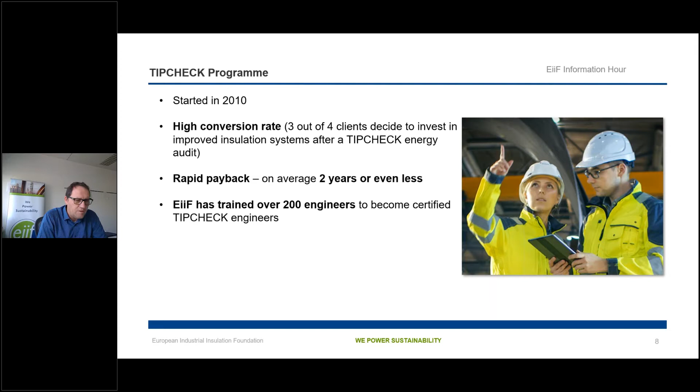We have trained more than 200 in the past years to become certified TIPCHECK engineers. And in total, 2,500 TipChecks have been carried out until today, more or less 500 in industry. So we talk about chemical plants, refineries, bigger breweries, food sector.

But also 2,000 have been carried out mainly by one very active company, which is specialized in flexible insulation mattresses to be put around valves, flanges, and this kind of stuff. And they focus very much on hospitals, airports, schools, so HVAC systems, which is very, very interesting also for the smaller insulation enterprises.

What we do from our side, Luis gives technical support. So if our TIPCHECK engineers have a problem, need some consultation, are not sure how to calculate maybe a special condition or situation, they can always address this to Luis, and Luis is supporting there.

We developed the TIPCHECK calculator, a dedicated and tailored software to compare systems and to identify the most economic insulation solution for the client. And now with the TBI app, we are also supporting with the TBI software, a professional tool, and we will give you more details during this information session today.

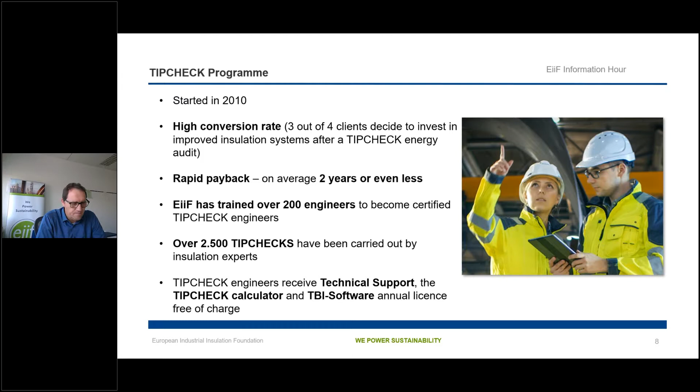Just very quickly, TIPCHECK engineer is limited to EiiF member companies only if you are an insulation expert, and this is for quality assurance. If you are an independent energy auditor, you can participate in the program without the need to become an EiiF member.

The reason for that is that we created this rule so that our companies can show their clients that the energy audit is really focused on energy auditing and not first of all on the wish of the offering insulation company to increase the insulation business.

And there's always an independent quality control possible if the client wants it, to check that we are really looking at energy issues and not at insulation business issues.

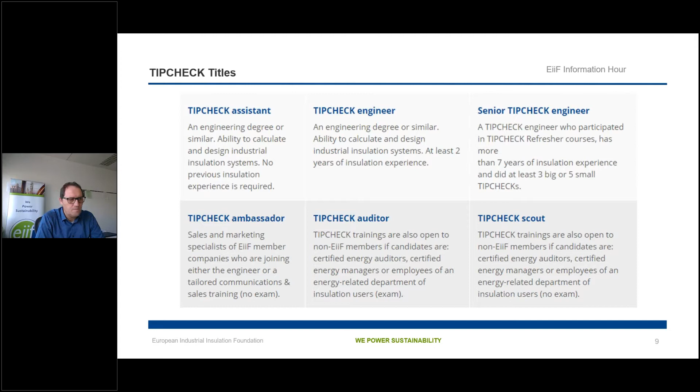Okay, looking at the TBI app, and there we get practical now. We are currently further improving it. Well, I don't want to say improve it because it's already mature, but with the expertise and the feedback from people more and more using it, we do see that here and there we could add another nice function to help it.

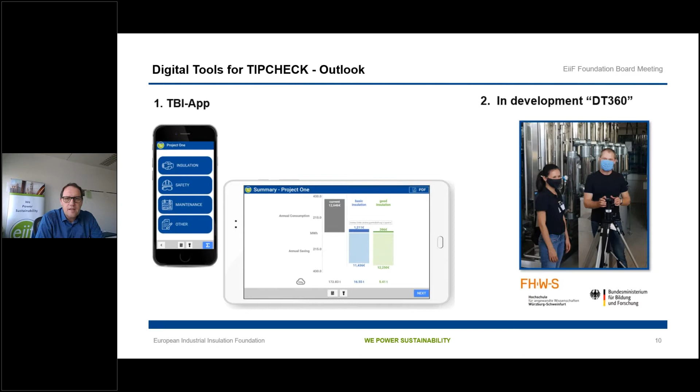And what you see in development, DT360 is something really, really interesting. We are developing it since 2016 in cooperation with a German university. It was funded by the German government, but we will go more into detail later on.

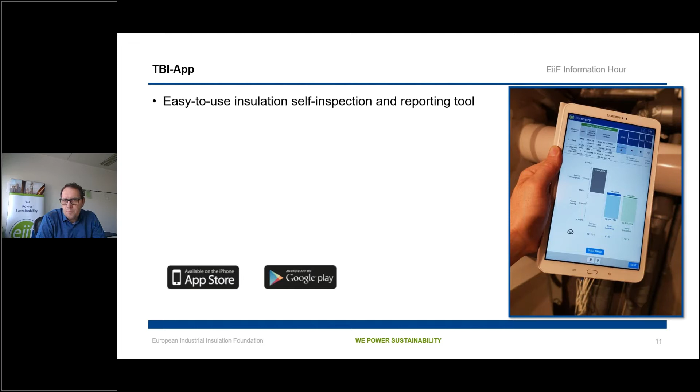What is the TBI app? For those of you who don't know it by now, it's for free. You can download it in the common app stores, and it has been developed as a very easy to use self-inspection tool. So anyone can use it.

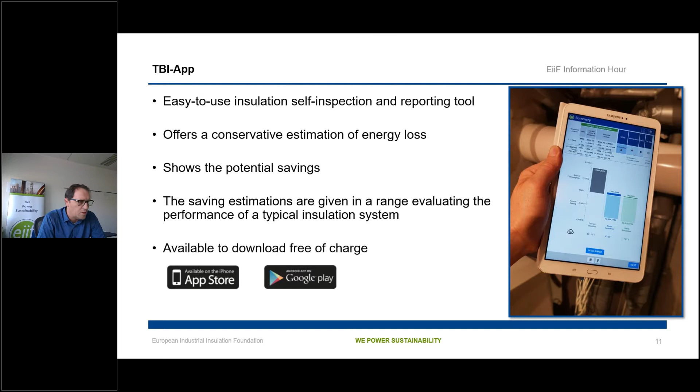It offers usually a very conservative estimation of energy losses, shows the potential saving in a nice and almost financial graph. And the saving estimations are given in a range so that you can say between good and basic insulation, you can save either 60 or 70 tons of CO2, depending on what you choose. And as I said before, it's available and you can download it for free.

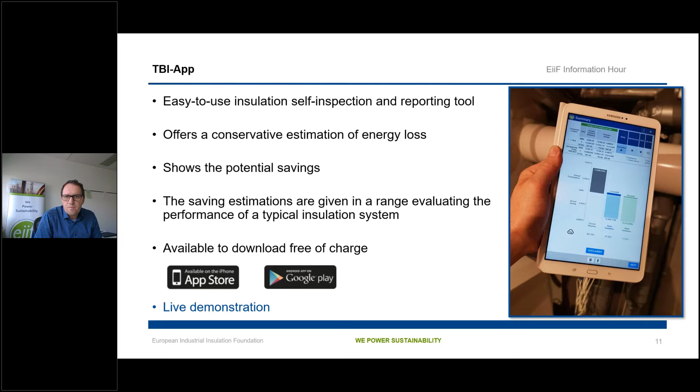And I will now switch to the tablet to show you the basic use of it. So let me just quickly do that. I have to find, and the tablets here, we have them, make presenter, okay.

Okay, perfect. So what you see on the mobile device, no matter if this is a phone or a tablet, it's available for iOS and for Android. You click on the TBI logo. Sorry, I will just quickly close that so that we really start from scratch.

Okay, you click on the TBI logo and you see the TBI is starting. First, you are asked to insert your name. I'll do this in a very short form. This is very important because different people can use the same TBI app on the same device.

This is interesting for companies. And you will always see who did the report, so that later on, when you look at the TBI report, you can check who did the inspection.

What you see here is we are on the project level, and you can see I'm using the GoToMeeting mouse. You can see that, for example, in the demo project, we did 10 insulation, 2 safety, 3 maintenance, and 2 other projects. But for today, we start with a completely new one. For this, I click on the plus.

And let's say, first of all, we take a picture. I use it, or I take it from the gallery to have something nice for this project. We give it a name. I call it Info Hour.

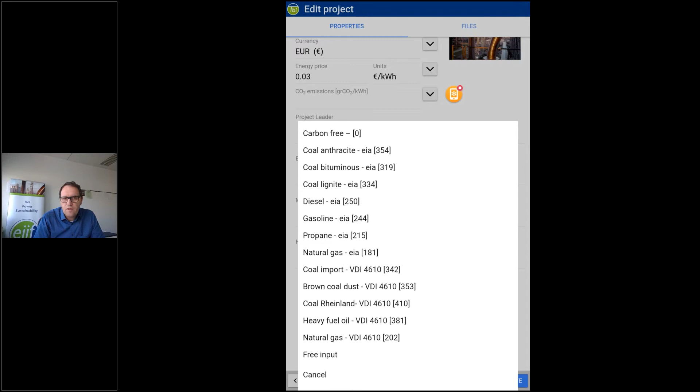You can define the currency. We stick at euros. You put the energy price, 0.03. CO2 emissions, by pushing this arrow, you get proposed a different kind of fuels, and related to that, the CO2. So we go here and we take 202. And then you can fill in the name of a project leader and so on and so forth.

But I guess we all know how that works, so I won't do that. And I save the project. Now, looking at the project level, we see the new project Info Hour. I click on it and I can start with my inspection.

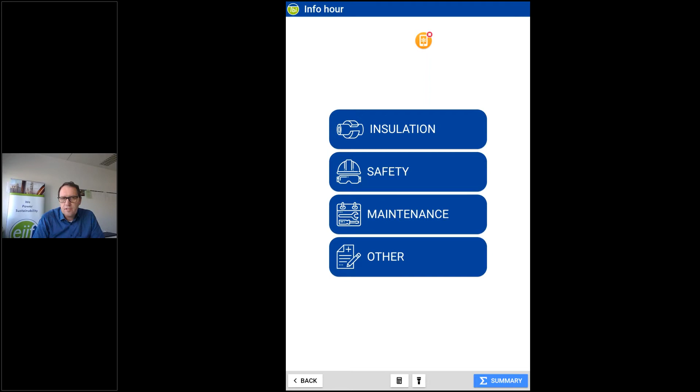What you see here is that you can choose to report either an insulation project, safety, maintenance, or anything else you would like to report. And of course, we go on insulation.

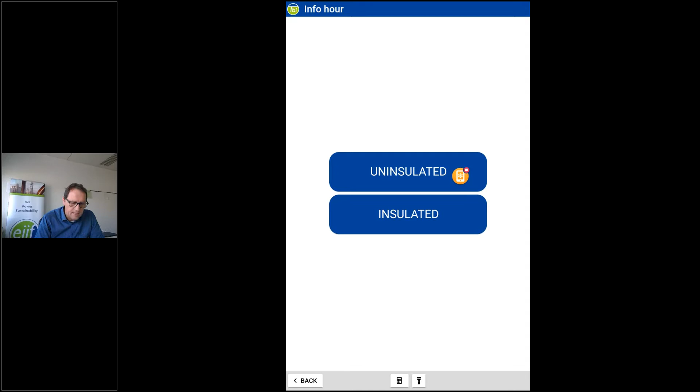Here you can choose between uninsulated or insulated. In our case, we take uninsulated. Then the tool asks you, are you looking at a pipe, a valve, a flange, or maybe a surface? In our case here, we take a pipe.

To make it easy for you to understand what the pipe is, we first take the picture. By clicking on this icon, we can take a picture. I could take a picture just now from my plant, but that doesn't really help us. So I still say, okay.

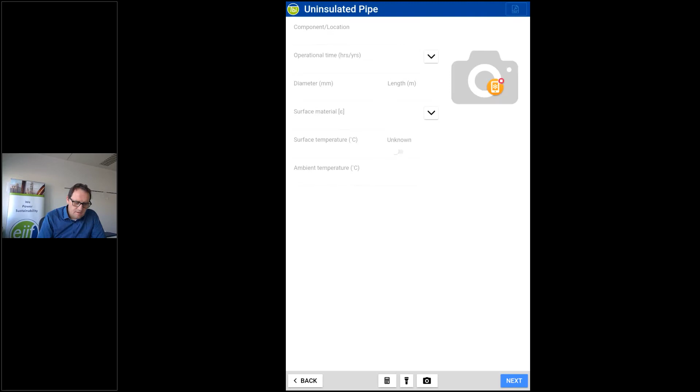And I click once more on it. I take it out and I take a picture from the gallery, which is a little bit more industrial. So choosing from my gallery, I take this one. Let me know if I'm too fast.

I'll make it big. So what you can see here is a typical TIPCHECK situation. There is a pipe. Some parts are insulated outside, pretty wet, the insulation material, but at some part there is not even insulation left anymore. And this is the situation we are looking at.

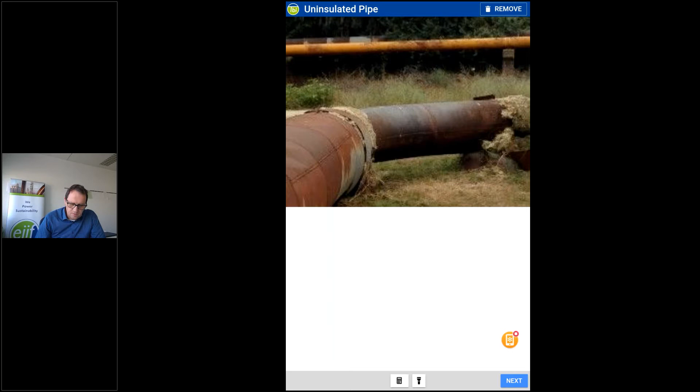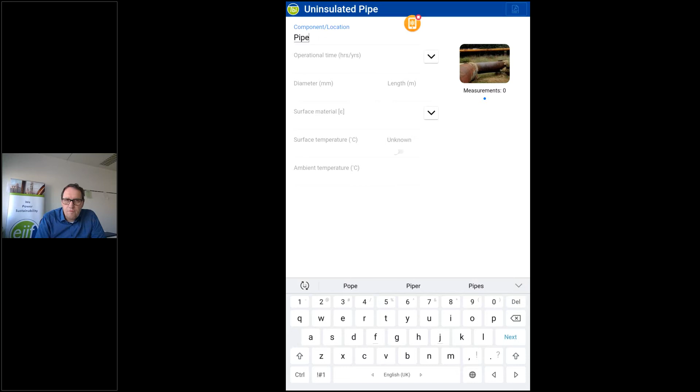All I need to do now in the TBI app is to give this a name. I call it pipe. For now, this is good enough. We need to know from the asset owner, our client, is this system operating for how long during the year? 1,000 hours or maybe full year.

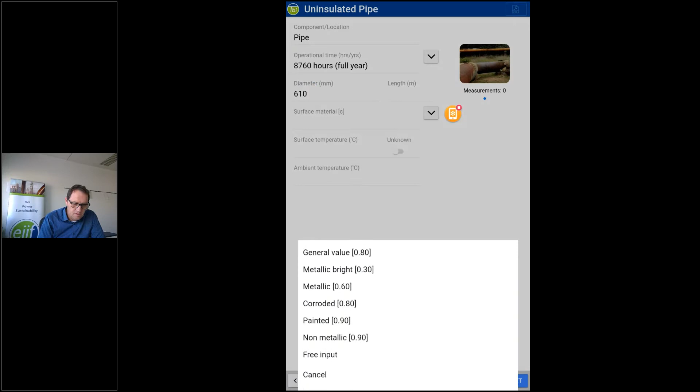I'm choosing the full year. The diameter is DN600. So in millimeters, we need to insert 610. The surface material we see is corroded, so I can choose the corroded value for the emissivity.

The surface temperature we measured 250 degrees, and the ambient temperature is 10. Okay. After doing all this, we click on next.

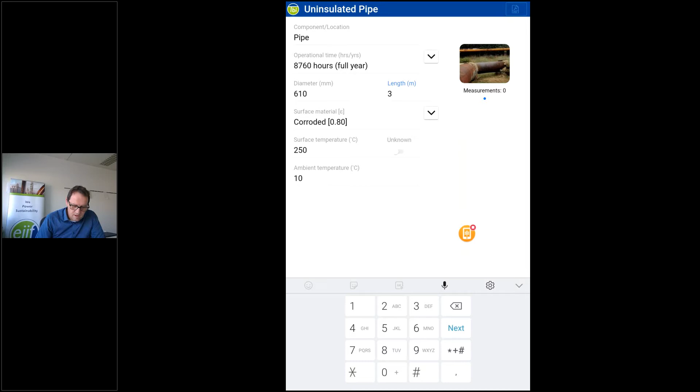Sorry, I forgot the length. That's nice. The tool is so smart that if you make a mistake, it tells you. So we assume, or we estimate this is 3 meters length. And then we click on next.

And what you see here now is you get a complete result. The current situation, we are losing 7,400 more or less euros. And we can reduce these losses with a good insulation in place down to 158 euros only, meaning we save between 6,700 and 7,200 euros.

But even more important, we can reduce from 50 tons to 1 ton only. And it also shows from an economic aspect how useful this activity or this measure is for the installation client. And that also explains why usually at a TIPCHECK, the conversion rate is 75%.

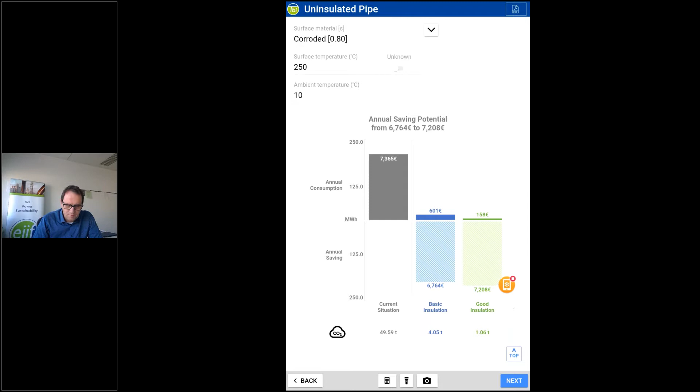We then click to the summary, and in the summary, we will get all the results. As we don't have enough time, I will just quickly show you the summary of the demo project, which we did before. And here you see, turning my tablet,

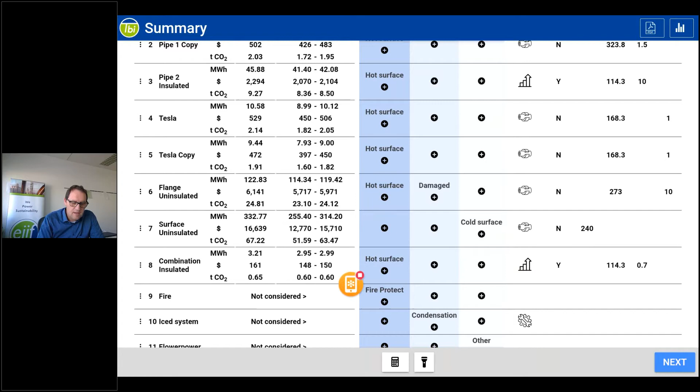that we have created a lot of projects with a lot of information and different reports on safety, maintenance, but also energy efficiency. And in the end, we get the total result of the project with all components calculated together to one.

By clicking on the PDF, we get a full TBI report. And I won't do this now, but I want to ask you, if you're interested, please go to the website. It's eiif.org/TBI. You find an example for the TBI report, and you find all the information needed.

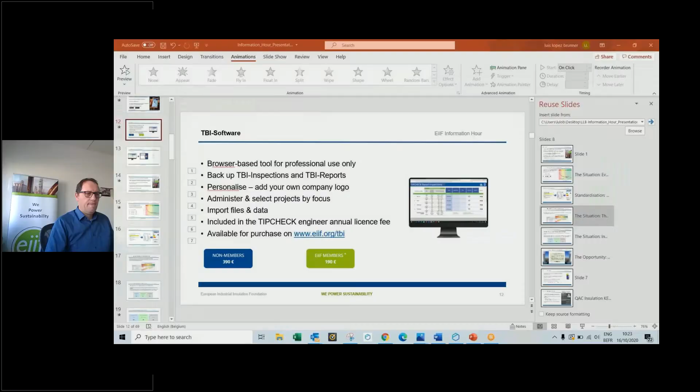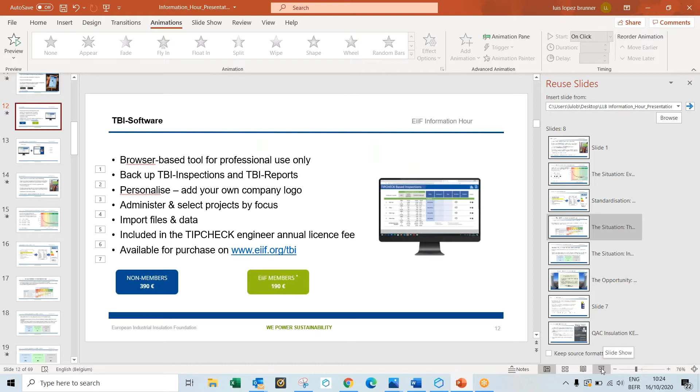In parallel to what Andreas just presented with the TBI app, we have also developed what is called the TBI software, a browser-based tool for professional use. It's basically a tool to allow us to administer and back up our projects.

You will be able to add more information about your client, and add extra pictures that you can take with your infrared camera. It's a tool that will allow you to organize and structure your work, but also to upgrade the report that you will offer to your customer.

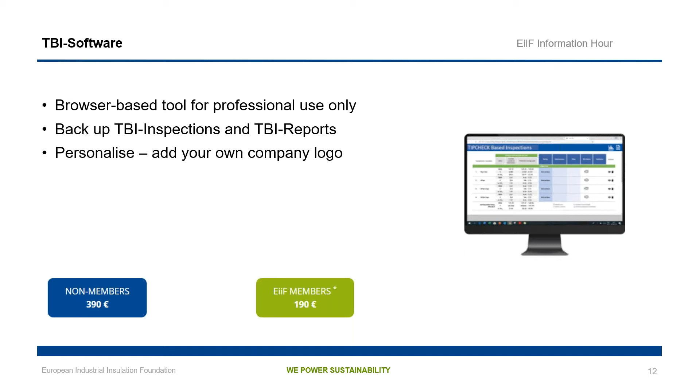What we start to see now with some TIPCHECK engineers is that they are getting organized in their organizations. The people on the field make the report, then send it to the central department. In this central department, a group reworks this report, and they maybe add an economical offer to finally present it to the final customer.

You can find all this information on our website, including the prices for non-members and members. What I can tell you is that this is something new.

We keep developing these two tools in order to reflect the needs from the market, and we have the best information providers, the TIPCHECK engineers. Based on that, we are developing new features for the tools.

For example, now we are working on a multilingual report, because we think the final communication with the customer is better in the local language.

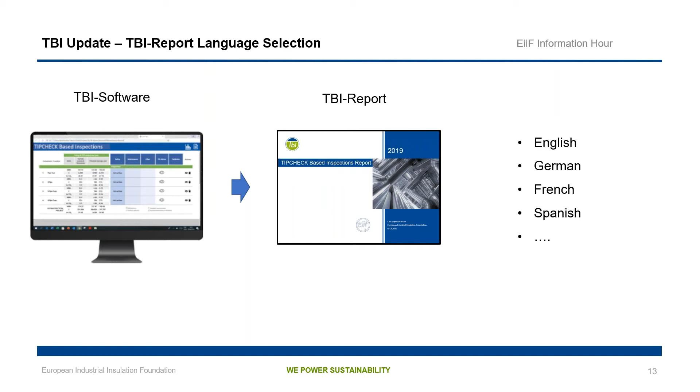Okay, now moving to the next point of the agenda.

Andreas just presented that we are working on a new study about the potential of insulation in industry. You probably already read the previous report, which was the starting point of our foundation, called the ECOFYS study. But we felt that with the new wave of the Green Deal, we had to have updated figures about the potential of our technology.

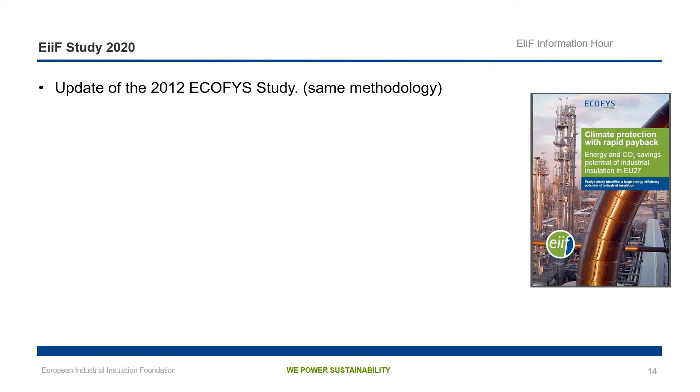So we decided to use the same methodology as the ECOFYS report, because that report managed to gather all the knowledge and experience until 2012. We used the same methodology, but updated figures for the energy consumption used in different industries and by country.

To do that, we bought a database from Enerdata, a consultancy company that works with European projects, in order to speak the same language as the people in the European Commission.

We have taken into account some new assumptions, because during the last 10 years we have also gathered good experience from energy audits. We included these new assumptions in the study, and finally we will provide the potential savings in energy and also CO2 emission mitigation.

This is based on energy classes defined by the VDI 4610, a guideline document available in Germany. We decided to use this methodology because we think it's the best way to communicate with the authorities and the best way to present the performance of our technology.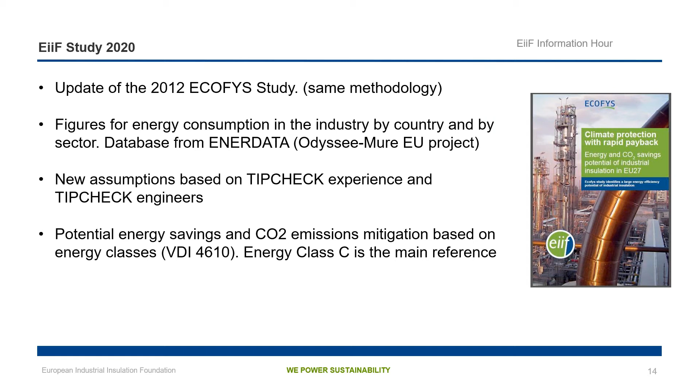We will go a little bit later into the next slide to present what is the meaning of these energy classes.

Finally, apart from the general study, we are going to provide fact sheets by sector and also by country. For our members, that will be very useful to work locally in order to increase awareness of the potential of industrial insulation.

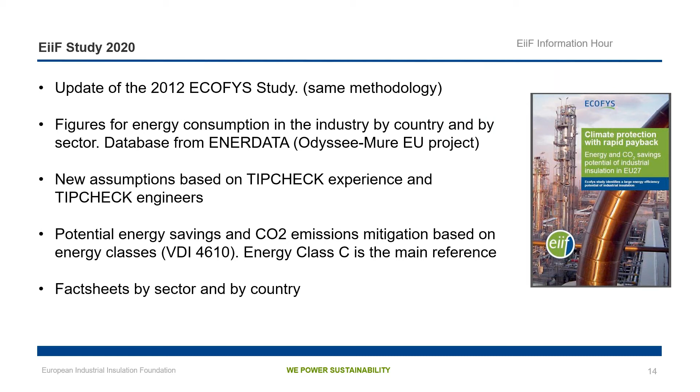As I said, we have chosen the energy classes as a reference, more specifically energy class C for our analysis, because we believe it is the easiest way to communicate about performance.

So the only document which is available regarding energy classes is the guideline from Germany, the VDI 4610, where basically they define or calculate heat losses in relation with the ecological optimum. So the standard, we don't have time to go through that in detail. We have spent quite a lot of time with our TipCheck engineers to explain how it works, and we are more than open to go through that with you too, if necessary.

So the standard defines what is called the ecological optimum, which is actually the lowest emissions in the life cycle assessment of the solution, not of the product, but of the insulation solution. So you consider the emissions from the manufacture, you consider also the emissions from the operation, and then you define what is the minimum of the life cycle assessment. And then based on this minimum, the standard defines the different energy classes.

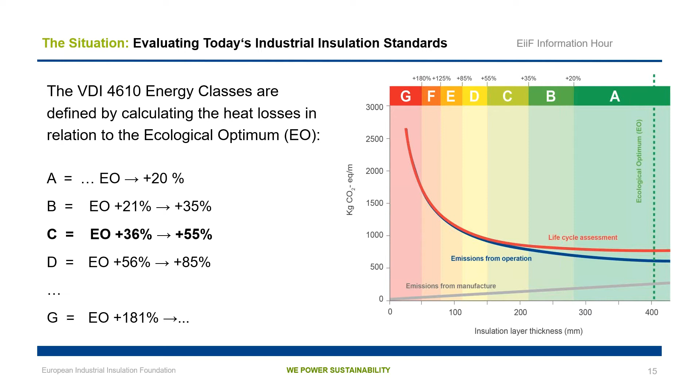So for these energy classes, there are some heat losses which are associated to this level of performance. And because we believe that this is the best way to communicate and to push the industry to increase their efficiency, we are also working on trying to upgrade this VDI 4610 part 1 guideline in Germany, to upgrade it to a European standard, maybe later also an international standard. We have already started some contacts with different standardization bodies, and we hope that in the coming months we are going to have a better picture about this project. That won't be for tomorrow, but maybe in a year or two it could become a European standard.

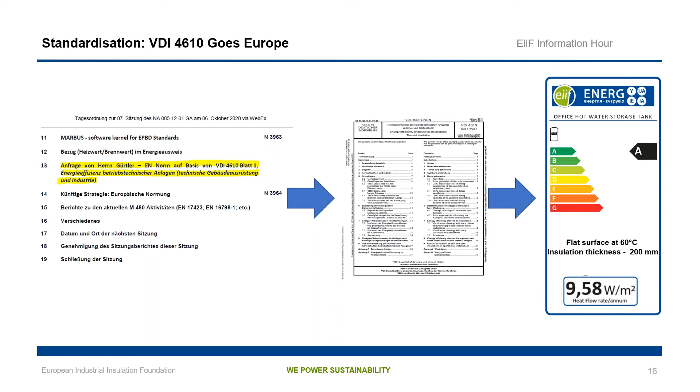So what is the situation? This is something that is explained in much more detail in our study, but just as a summary, we have identified that the good practice in the different countries in Europe is not sufficient to reach the ambitious target of the European Union.

Moreover, there are a lot of technical specifications which are not defined on energy efficiency, but just defined on safety, for personal protection. So they define a surface temperature in order to avoid that a worker gets burned. This makes the losses that we are having today, as specified in the technical specification, quite high, leading to high levels of CO2 emissions and high levels of energy consumption.

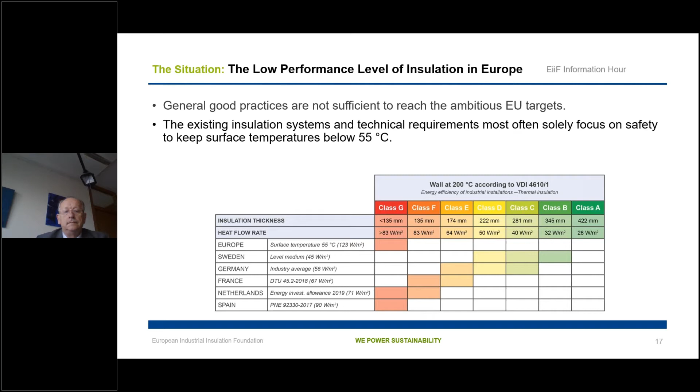So as you can see in this summary table, this is just an example for a wall at 200 degrees. We see that if we take into consideration this guideline, the energy classes, even the best in class, which is Sweden, only reach in the best case scenario an energy class C or B. Then we go to countries like Germany, France, Netherlands, Spain, and we see that the levels are, in general, on average, something like class F, class E.

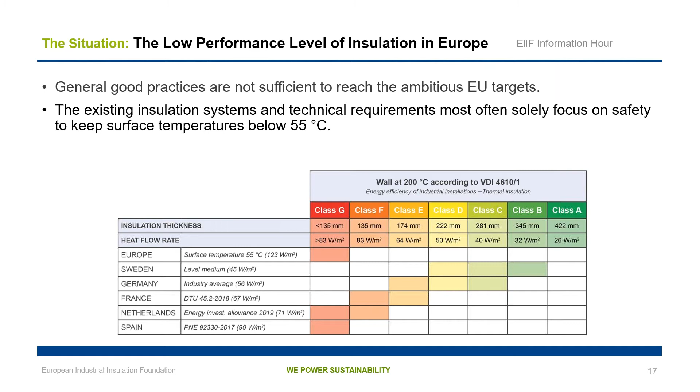So it gives us a lot of room to improve, and this is where we are going to work in the future, to try to convince the different administrations to show that there is this potential. But apart from that, and this is the most important point, many plants in Europe are quite old.

So we see that there is an important need of maintenance, of repairing insulation. It means that even though the technical specifications are not very performant, in reality the real performance is much worse, because it's not properly maintained, because some components have fallen apart and nobody has replaced them. So what we see is that in reality, the real losses are much higher than the losses you could calculate with the technical specifications, which are not very good already, as we have seen in the previous chart.

So this is actually our starting point for our study: we know the technical specifications, how they are. We know that it's not properly maintained, so the losses are higher than what they have in their specifications. We have taken these values from our experience in the industrial insulation branch, which says that, for example, at middle temperature, there is 6% of the surfaces which has a system that is damaged or where the insulation is not existent.

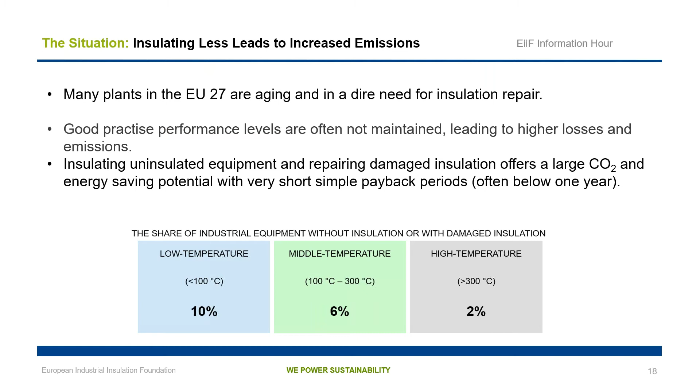Okay, so the study, the figures have already been processed, so we know what will be the output of this study. We are just working on the document to add all the graphical parts and working on all these fact sheets for countries and for sector.

And what we have identified, just regarding emissions, is that we could avoid up to 40 million tons of CO2, which is a very important figure, and which resounds a lot when we talk with people from the European Commission.

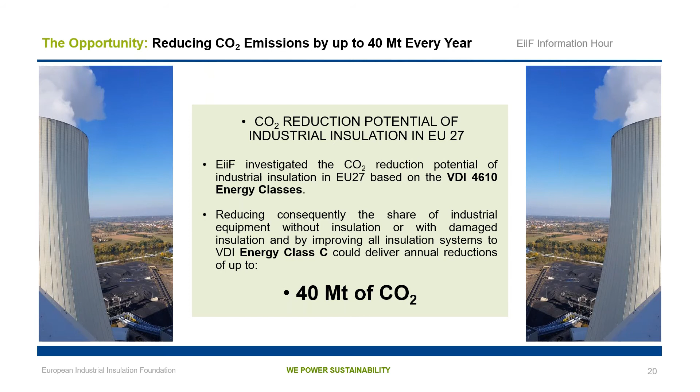And apart from this 40 million tons of CO2 emissions, they come from, as explained before in the study, a reduction in energy consumption. So what we calculated in the study is what we can save if we upgrade our insulation systems. Doing all this calculation, we found that we could save for the industry in Europe up to 14 million tons of equivalent oil, which is very, very impressive.

We were all amazed and surprised about this potential, because it represents 10% of the gap that we need to close to reach the 2030 target.

So if you look at the chart, today what we are consuming in Europe is 989 million tons of equivalent oil. We know the target in 2030 is 846 million tons of equivalent oil, and we can provide savings of 14 million tons of equivalent oil. So it represents 10% of the way to reach the final target set by the European Commission.

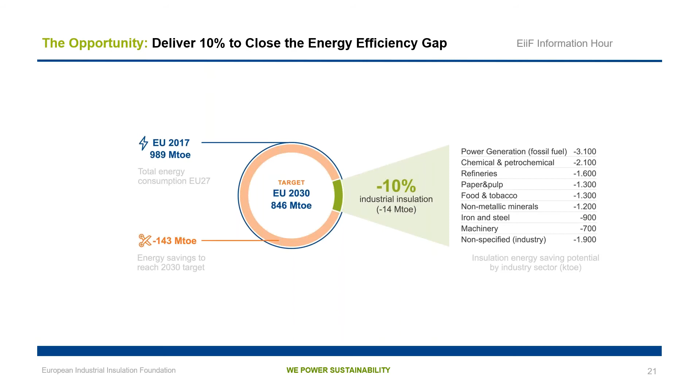And as I said, we have all these figures split by sector and by country. So we can even approach some European associations, for example for steel manufacturing, and try to convince them, to convince their members, to at least look at the technical specifications they are using today in the industry.

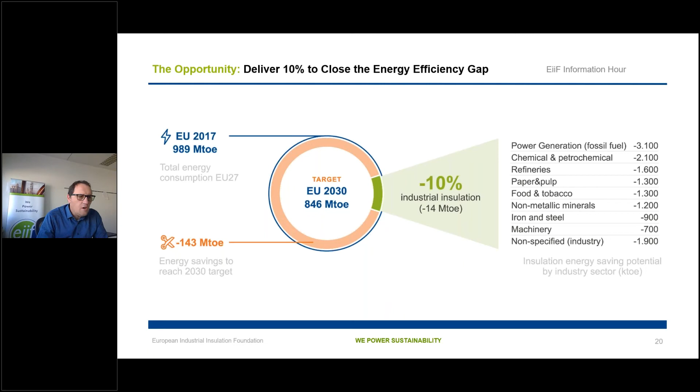So let's go into practice and take one of the examples, another TipCheck engineer, Patrick Dallens from Bilfinger here in Switzerland. He went into a plant in Switzerland and identified a typical situation.

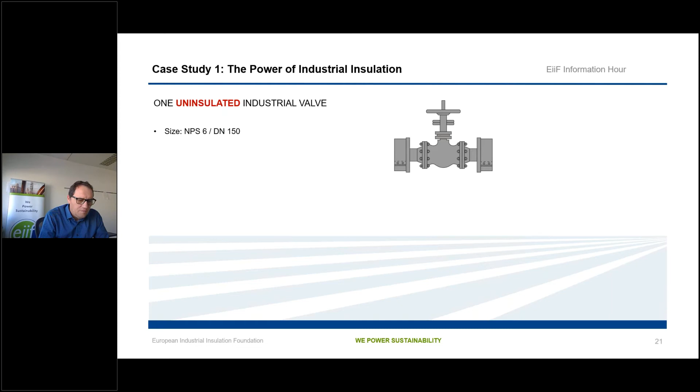Looking at the DN150 uninsulated valve, the temperature and energy input here to keep it at 150 degrees Celsius is about 10,600 kilowatt hours, as the system is operating and running all year. So you can imagine if you don't put insulation around this valve, these 10,600 kilowatt hours just fly away, which is what we try to illustrate in this graphic.

What Patrick then said was, let's put a box around it. And this was the thermographic image of his inspection. He said, if I put a box around it, and this is an energy class G box even, so a very standard solution, we can reduce the energy loss from 10,600 down to 600 kilowatt hours only.

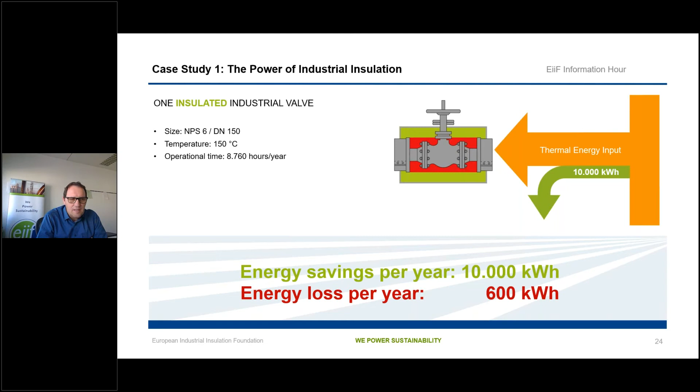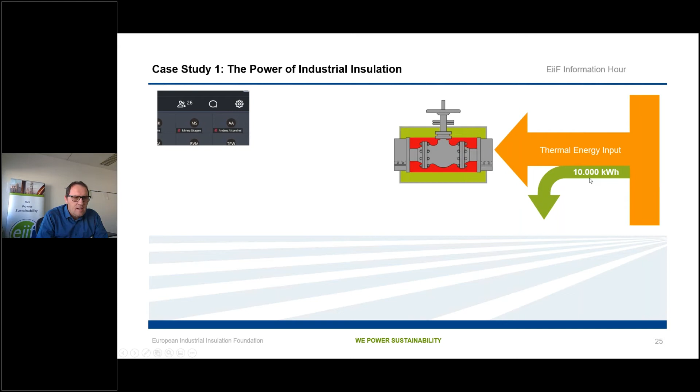His idea was, what can I do with this thermal heat which I'm saving, the 10,000 kilowatt hours? What Patrick said was, okay, I transfer the 10,000 kilowatt hours of thermal heat with 40% thermodynamic efficiency into electricity, and I use it to charge the battery of an electric car. Those of you who fancy cars may know which kind of car this is.

And what we would like to ask you now, please fill it in the chat function, we'll give you a minute for that. How far do you think you can drive by just insulating one valve with a standard box? Do you get 5,000 kilometers, 10,000 kilometers, or let's say a free ride ticket for the entire year because it will drive you 20,000 kilometers? Okay, please use the chat function, I'll give you a little bit of time. I see the first ones flying in, 2, 3, 4, perfect. More, please.

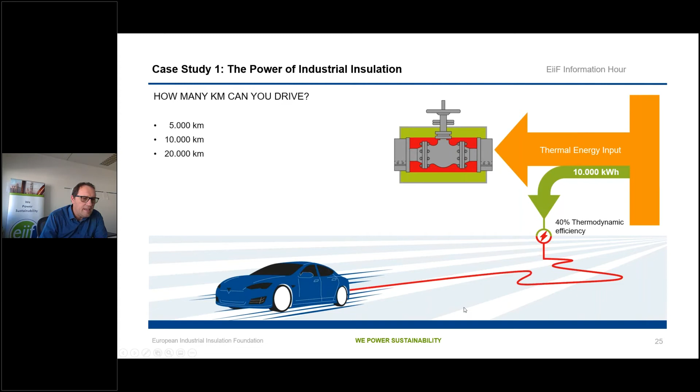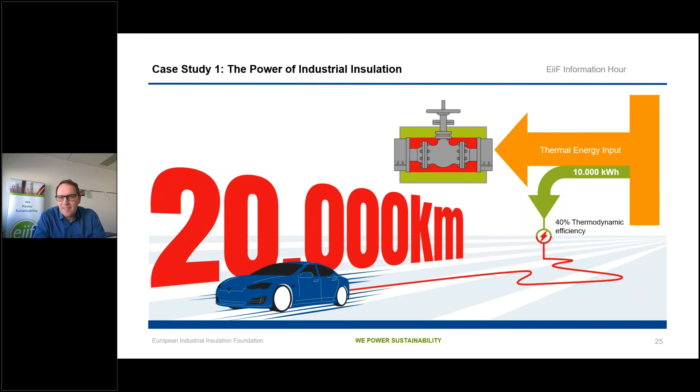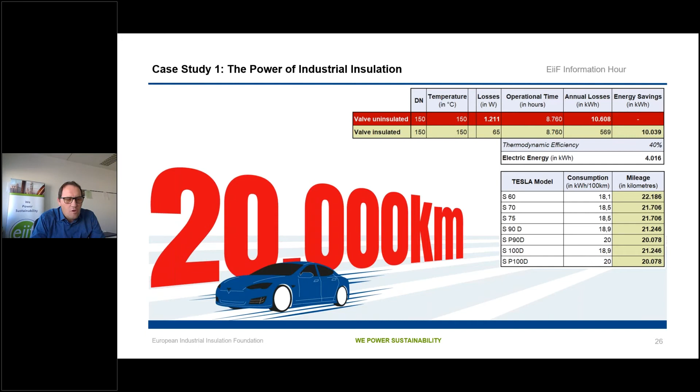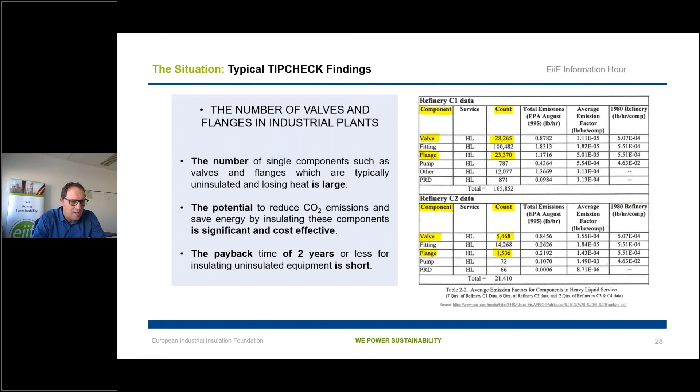Another example from our TipCheck engineer and Vice President Michele Manucci was that he received the job to remove the corroded roof of a storage tank, which after years with no maintenance had big corrosion problems, and there was the danger that the roof would fall inside the tank. He was asking the client, but who's putting the new roof? Who will apply the insulation? And the client told him, I don't put insulation anymore - it's just a 60 degrees Celsius tank, and I want to avoid any corrosion issues in the future. Being a very good senior TipCheck engineer, Michele explained to him the consequences and convinced him to do something.

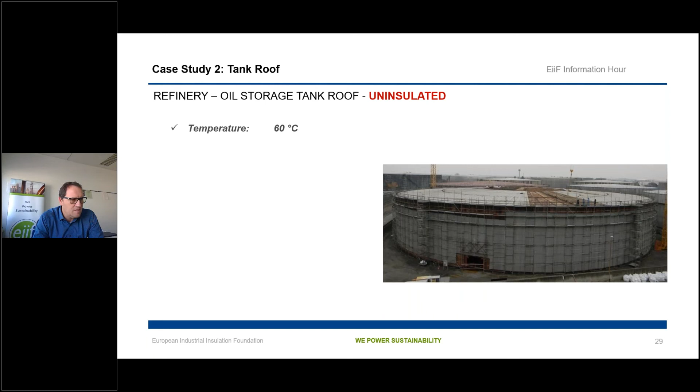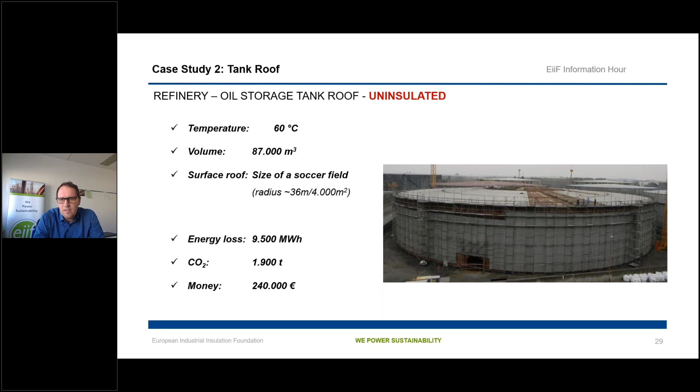So again, the temperature was 60 degrees. The volume of the tank is 87,000 cubic meters. The surface of the roof has the size of a soccer field, and the energy loss without insulation would have been 9,500 megawatt hours, emitting almost 2,000 tons of CO2 and a money loss in his financial budget of 240,000 euros he would have had to pay additionally as energy cost. Insulated with 30 millimeters, which is equivalent to the energy class G system, Michele convinced him that he could apply a system which has very high corrosion protection, but will also save him annually about 185,000 euros, energy-wise 7,500 megawatt hours, and in total reduces the CO2 emissions by 1,500 tons. So that was a pretty good and successful TipCheck activity here, convincing the client.

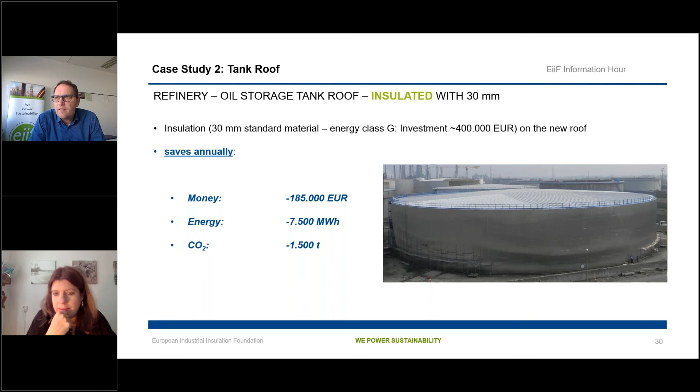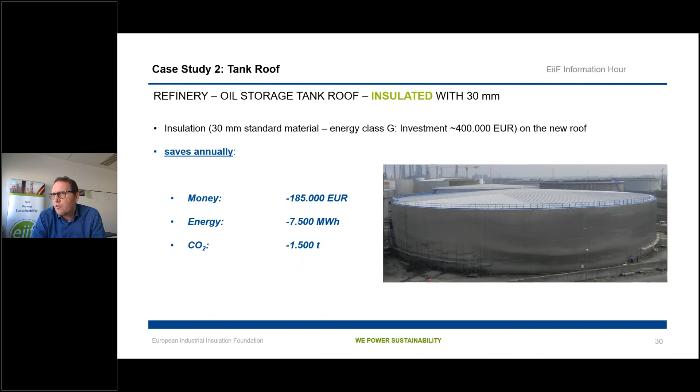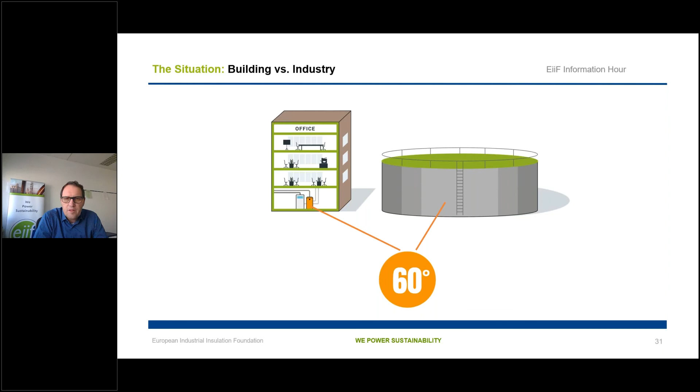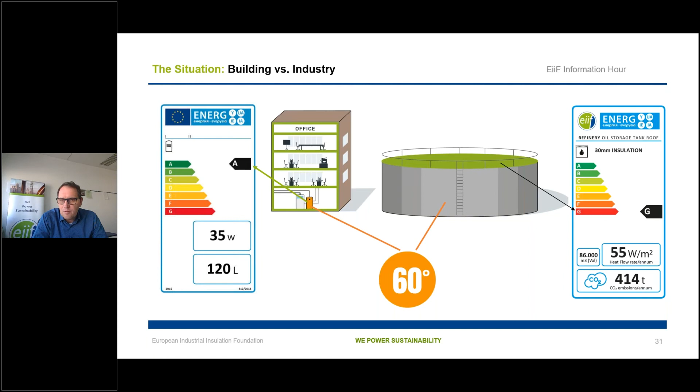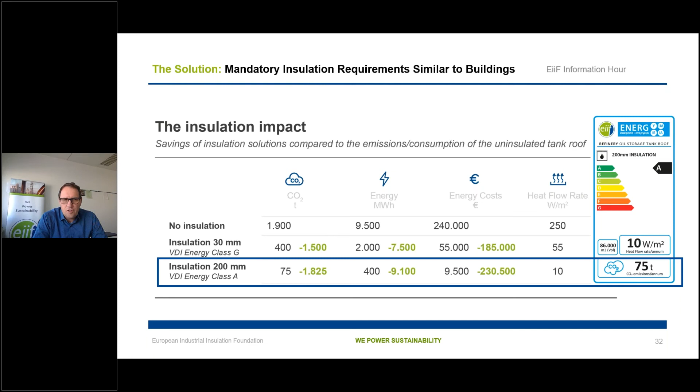Okay, so going to the next slide, this is what we use in Brussels: in industry, there are very different ideas about insulation than in the building context. Comparing a hot water storage tank with an oil storage tank, both have 60 degrees. You won't find in the market any hot water storage tank in a building which is lower than energy class A. Looking at the storage tank and the solution which was applied, we talk about an energy class G, which has still 400 tons of CO2 emissions, but as I showed before, is saving 1,500 - so much better than nothing. But from a technical perspective, it would easily be possible to upgrade the storage tank roof to an energy class A, and with this reduce the CO2 emissions down to 75 tons only, instead of 1,900. We can see this big potential here, which is just waiting out there to be picked up.

If we compare energy class G and energy class A, and here you see it's a 30 millimeter against a 200 millimeter insulation, we see the big differences in reduced CO2 emissions.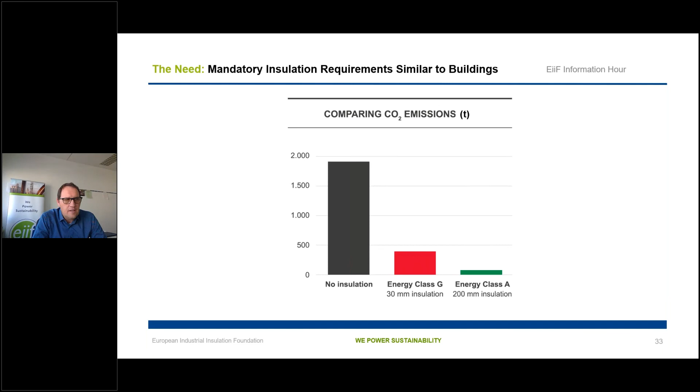Okay, the benefits are very clear, and I will go through this fast. With all these activities, we can significantly cut annual CO2 emissions. Luis explained it in detail in the study. We reduce energy consumption in industry by 14 million tons of oil equivalent. For Europe, this contributes to the Green Deal and the green recovery, and for industry, it's increasing competitiveness. This is not a burden, this is a real added value. It offers investments with very rapid payback, and creates safer and better working conditions. So it's a clear win-win-win for anyone involved.

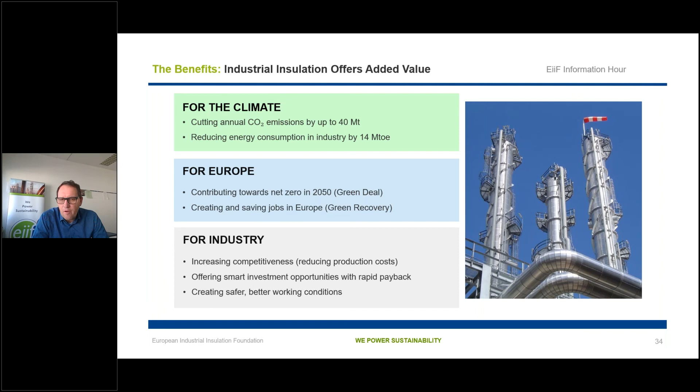And of course, with EiiF, we are promoting this message. This brings me to my colleague Minna, who will give you a quick introduction into our advocacy activities where we use all these figures.

Thank you. So on this slide, we show you a small selection of our advocacy activities. We are very active on that front, and this is a must at the moment to reach the climate targets. For instance, we participate actively in different consultations.

Andreas, our foundation director, has actually been invited to participate in the EED Article 8 workshop. He will be working with the member states, and for us, being based in a non-EU country, this is great. And also we are finalizing our white paper.

You can see the picture here, it's the one on the left. It should be available next week. It is an online document, and it explains in just about 10 pages, with a reading time of only 10 minutes, how industrial insulation can provide the 10% energy savings needed to reach the 2030 target.

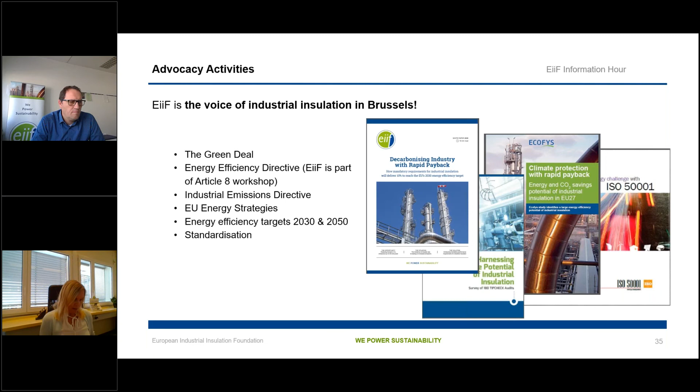And we also signed several letters supporting the emissions reduction targets. The highlight was definitely this CEO letter. It was organized by the Corporate Leaders Group, with the aim to put more pressure on the decision makers to increase the emissions reduction target.

And this was even mentioned in the European Commission President's speech in September, where she informed that the European Commission proposes to increase the target to 55%, and that was great.

And for the letter to be mentioned, we are proud. Out of the 185 signatories, which may have increased since I last checked, there were 23 EiiF member companies on it, and we were even congratulated by the Corporate Leaders Group.

Since then, the European Parliament has voted for a 60% reduction, which is really great news, but the work is not done yet because the EU 27 still has to vote to accept. This brings us to the EED Article 8, and Andreas, since he's part of this working group, will explain in just a few words.

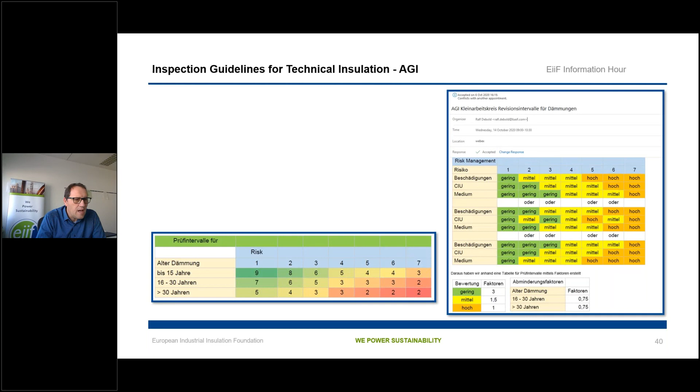We will have an online meeting with the cabinet of the President of the European Council, Charles Michel. For those not often in contact with European institutions, I just wanted to note the role of the European Council and the name of the President. We'll present the white paper in this one hour meeting, explaining from an industrial perspective that going for a higher ambition, at least 55%, even better 60%, is absolutely doable.

As we're running out of time, I'll try to speed up. Standardization has become a very important project, and I'm happy that we've already had two meetings with the AGI, the Arbeitsgemeinschaft Industriebau, led by BASF. We already have first concepts developing inspection routines for industrial insulation, meaning there will be a neutral paper which, based on the risk level and situation of insulated equipment, recommends inspection every 2, 3, or 5 years, depending on the situation. This is a very interesting project that will have a significant impact on how industry looks at insulation systems in the future.

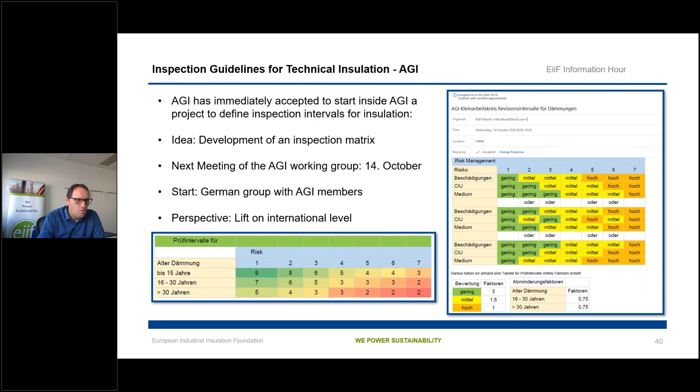So this is one of our highest priorities. Another one, it's a pity we're running out of time because I could talk a lot about it, but instead I'll just show you. If you want to know more about the technology behind it, please don't hesitate to get in touch. What you see here is almost 3D, but it's much faster, much cheaper, and very easy to use. So what you get is a picture of, in this case, a heating room.

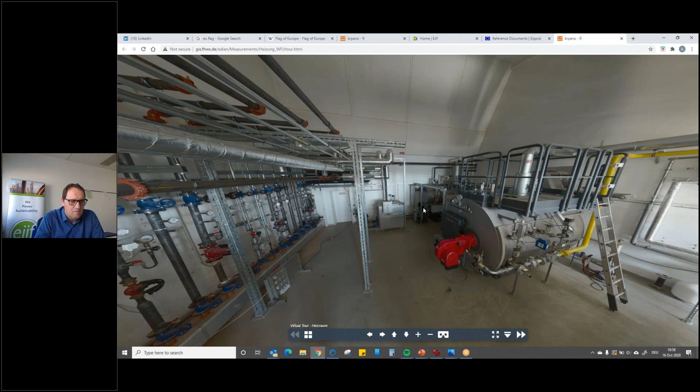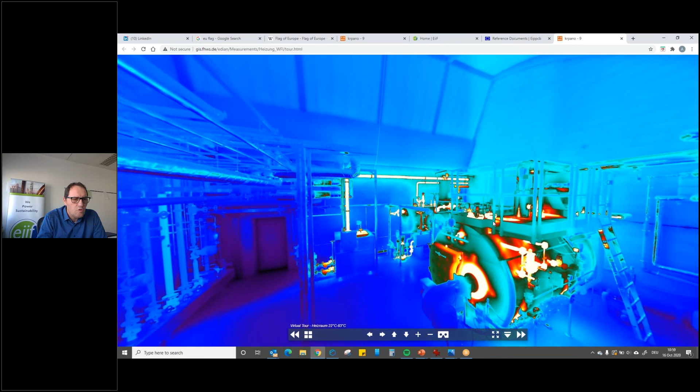After using the devices for 15 minutes, pushing a button for the digital camera and a button for the thermographic camera, you end up with a complete infrared and digital picture explaining in a very short and illustrative way where the hotspots are. For example, here on this steam producer on the top level, we can even zoom in and see manholes which are not insulated. As soon as the tool is fully developed, you can even measure the temperature in your software program. This is one of the inspection digital tools developed with the Fachhochschule Würzburg-Schweinfurt.

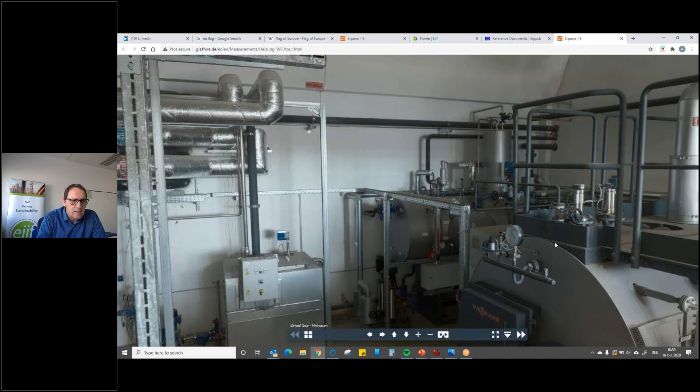We started the project as the edian project in 2016, and it had a second phase, now called Thermohead, which is the infrared camera. You can see the quality of the pictures is extremely detailed - you can almost read the pressure gauge on this device. If you want to know more, please don't hesitate to get in touch with us. It's a very interesting tool to use.

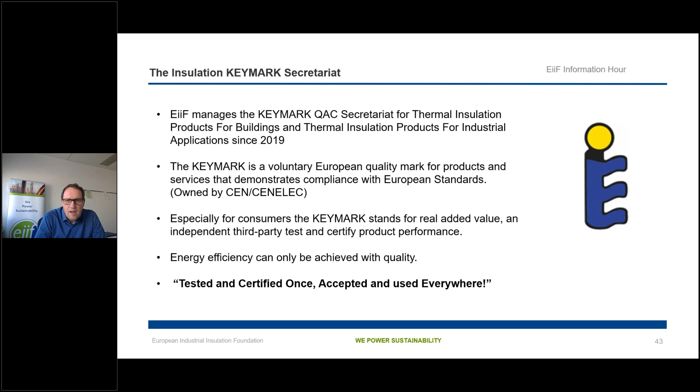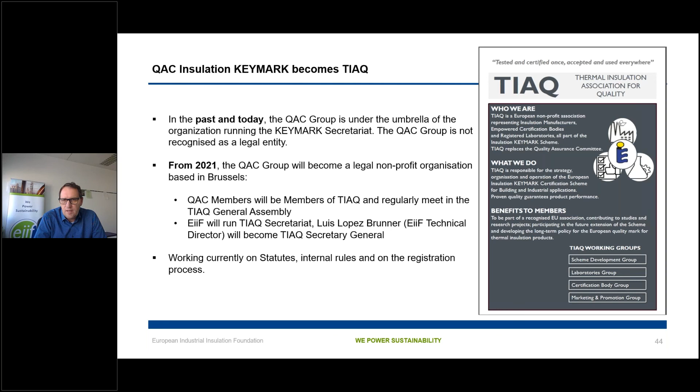Okay, I need to move on here. The KeyMark Secretariat - Luis, you asked me to skip this, but I'll just mention that we are running the Insulation KeyMark Secretariat. We are actually developing and establishing an organization called TIAQ, Thermal Insulation Association for Quality, located in Brussels, which takes care of the KEYMARK Quality Assurance Committee. Again, as we're running out of time, if you want to know more, you know where to find Luis, myself, or Mina, and we're happy to give you more information.